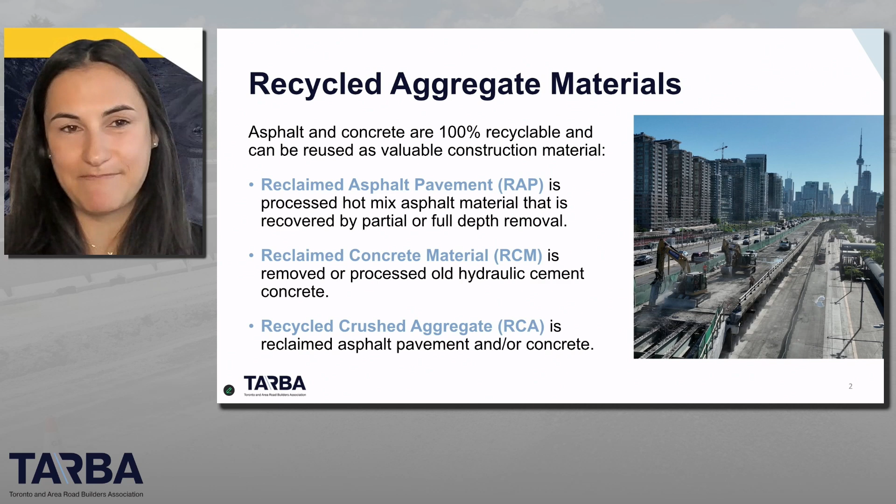RCA is a sustainable product that offers some of the greatest environmental benefits at a low cost. These materials have already met performance specifications when they were originally used, and when reclaimed, undergo an additional rigorous process of crushing, screening, testing, and quality control to be repurposed for their intended application as construction material in new projects. And Dominic, our expert speaker today, will have more on that as part of his presentation.

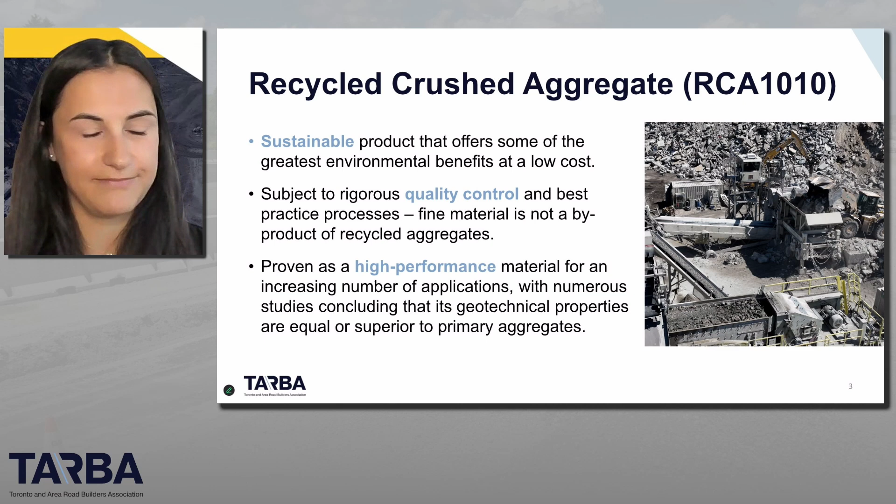Extensive testing in Ontario and internationally has shown that RCA is a high-performance material for an increasing number of applications, with numerous studies concluding that its geotechnical properties are equal and at times superior to primary aggregates. In fact, when RCA conforms to OPSS 1010, project owners can be confident that these materials will meet all performance requirements and quality expectations. The OPSS 1010 is administered jointly by the Ontario Ministry of Transportation and the Municipal Engineers Association, including representatives from the construction industry.

It allows aggregate used in road bases, shoulders, and backfill to be composed of up to 100% recycled concrete and up to 30% recycled asphalt. Hot mix asphalt can also contain up to 30% RAP. Despite these provincial standards, municipalities are setting their own local policies. As a result, practices can vary widely by municipality, really eroding some of the cost savings that we see with this product, even in economically significant regions like the Greater Toronto Area. For example, municipalities have specifications requiring primary aggregate only as part of their tenders, missing out on the benefits RCA use offers to both municipal capital budgets and their net zero targets.

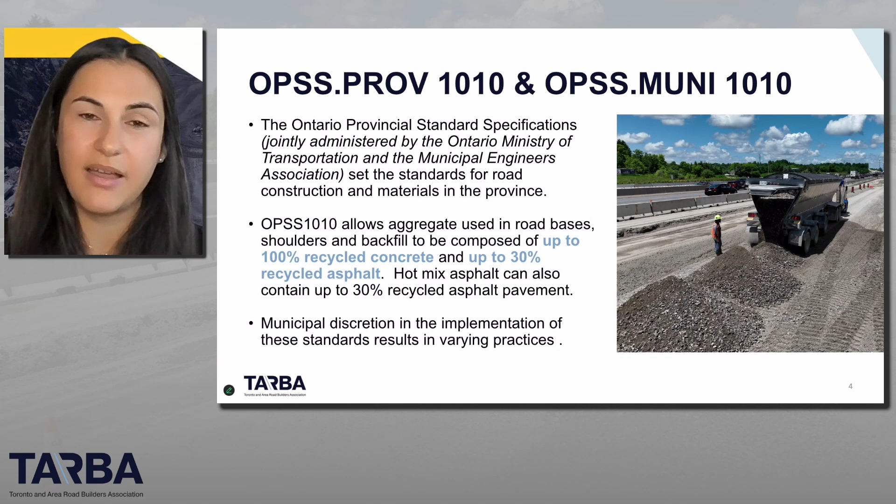The material significantly lowers carbon emissions, pollution, and project costs associated with long-haul trucking of that material, while performing equally or better than primary aggregates. The shorter distance traveled also means less traffic congestion and wear and tear on our roads. Lastly, RCA preserves non-renewable resources and extends the life of existing pits and quarries.

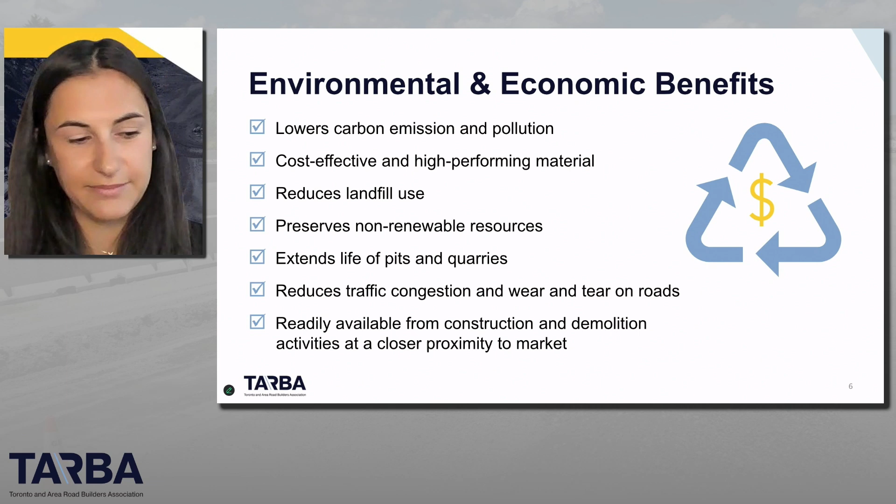The question repeated was around the cost and emission savings. So as some of you know, transportation is up to 60% of the cost of aggregates. This means that every extra kilometer aggregate has to be trucked to a job site increases the overall building costs and carbon emissions. And RCA is available at a fraction of the distance to new construction sites. The chart to the right, provided from research by EXP, estimates the fuel consumption and associated greenhouse gas emissions for the 25 million tons of aggregate that's used in the GTHA. As expected, longer distances traveled require more fuel and emit significantly more GHG emissions.

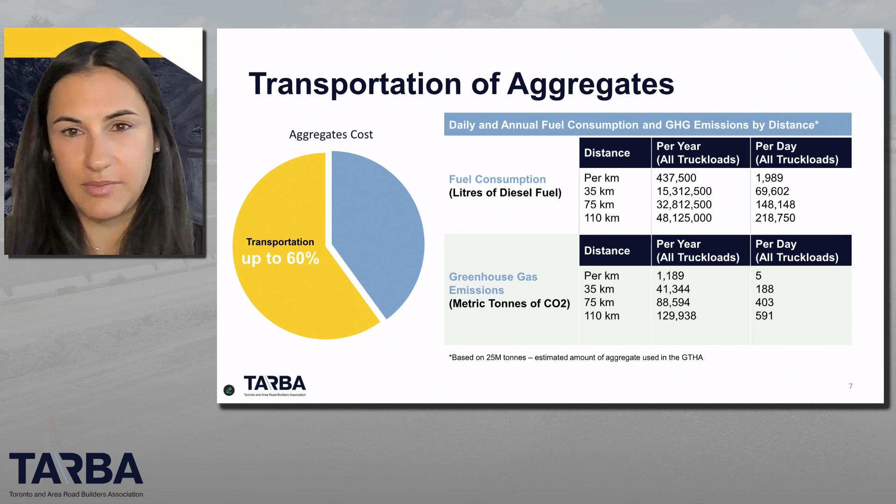As part of the EXP research, they also examined RCA use in 4 different projects, from a parking lot to a big box store distribution center in the Greater Toronto Area. The research found that the higher amount of RCA used on a project, the bigger the cost savings and carbon reductions. On average, across the 4 projects, the savings were $8 per ton, and the carbon emission reductions between the primary and recycled aggregate were predominantly derived from the shorter distance travel.

As you can see from the chart, that is 18 kilometers versus 80 for primary aggregate, 6 kilometers versus 115, 10 versus 50, and 14 versus 70. And you can see the project savings for each one on the right-hand side, along with the GHG emissions in metric tons.

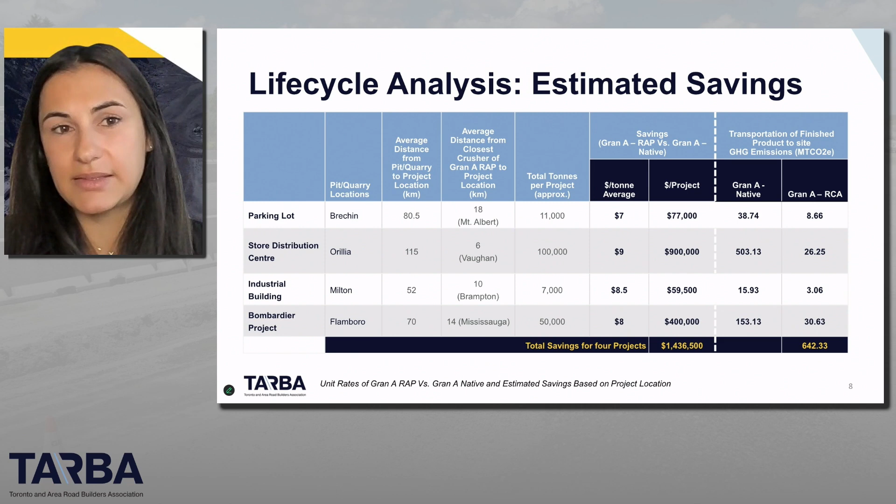The biggest impact for these economic and environmental savings can be found at the municipal level. In Ontario, just over 50% of all aggregates are used in the construction of roadways, bridges, and tunnel infrastructure. Municipalities in Ontario own and manage more roads than the provincial and federal governments combined. In fact, municipalities are the largest consumers of aggregates, using about 60 to 70 million tons per year, with 50% of their budgets allocated for construction and infrastructure.

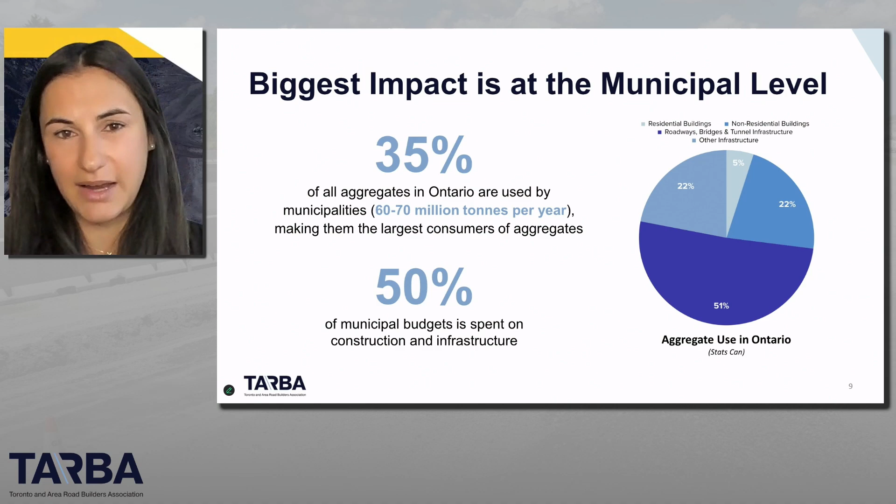Thank you, Rally. Thank you for your introduction. Glad to be here. Thank you to everybody, audience, Dominic and Jason. Pleasure to be on the panel with you, gentlemen. We did a great job together.

I just want to make a note of it, with respect to our RCA success that we had on the project. There were a lot of other key individuals from the consultants and the stakeholders that were involved to make it really happen. It goes back to the fact that the relationship matters, and creating the environment where everybody has a sustainability mindset is key. So a little bit high level what the project is about.

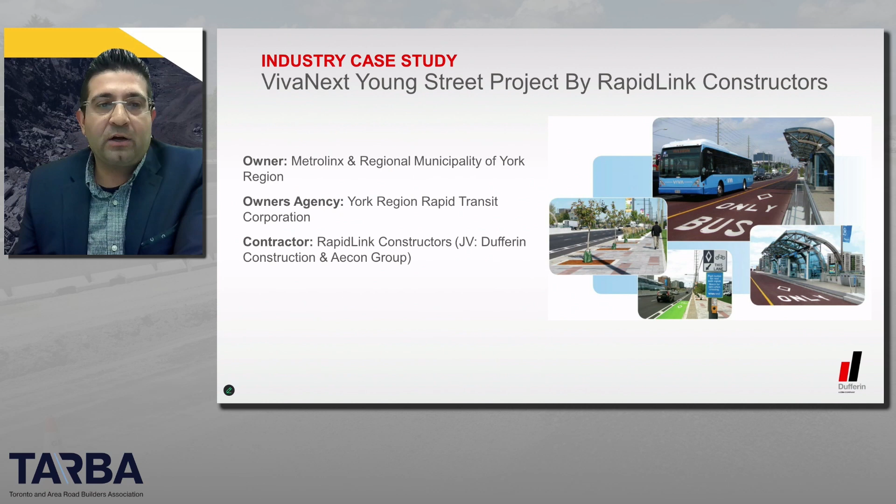So the owners, obviously Metrolinx and York Region, and the owner agency, York Region Rapid Transit Corporation, were the agency that managed the entire Viva program within York Region. Dufferin Construction was in a joint venture with Aecon for RapidLink Constructors. We were the design builder for the project. The project was about building bus rapid transit in the middle of Yonge Street. As you can appreciate, major utility relocation was required. The project was almost 10 kilometers within 3 major segments, one in the town of Newmarket, the other 2 in the city of Richmond Hill.

Building the median rapidway, full road reconstruction and widening was required, as well as the bike lane. 20 bus stations within the corridor. Beautiful landscape on either side of Yonge Street, almost 6 kilometers of landscape on that project, and also within the median. Part of the program required underground work in the wet utilities, in terms of the storms, the sanitary and the water main, and also rehabilitation of the existing. Retaining walls were required along the corridor because of the grade differences, and also culvert improvements and headwalls. So you can imagine how much granular was required on the job.

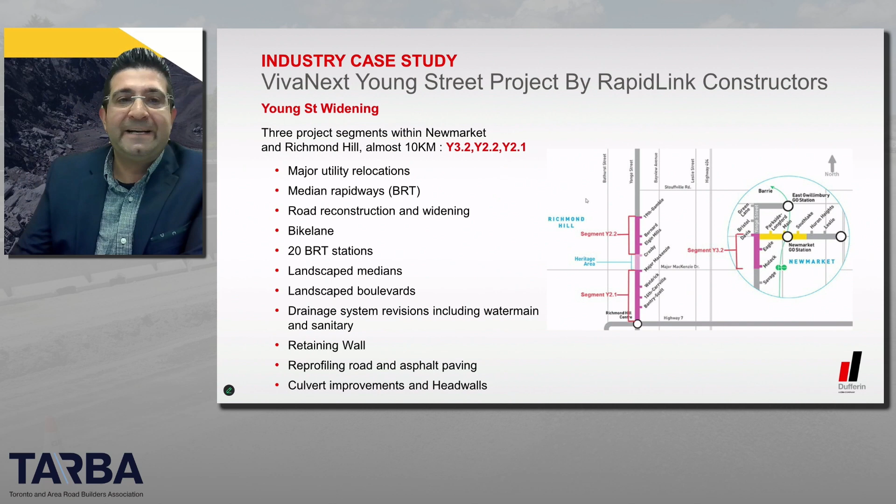Before we dive in a little bit on the case study, I think it's an opportunity to share with you what we see as sustainability within the projects, and what is really common in our industry, and particularly in our Dufferin operation, is really understanding the network of the sources to the projects. As Raleigh mentioned, the carbon footprint is really important to consider, and the recycling of material in terms of the concrete and asphalt, and the efficiency.

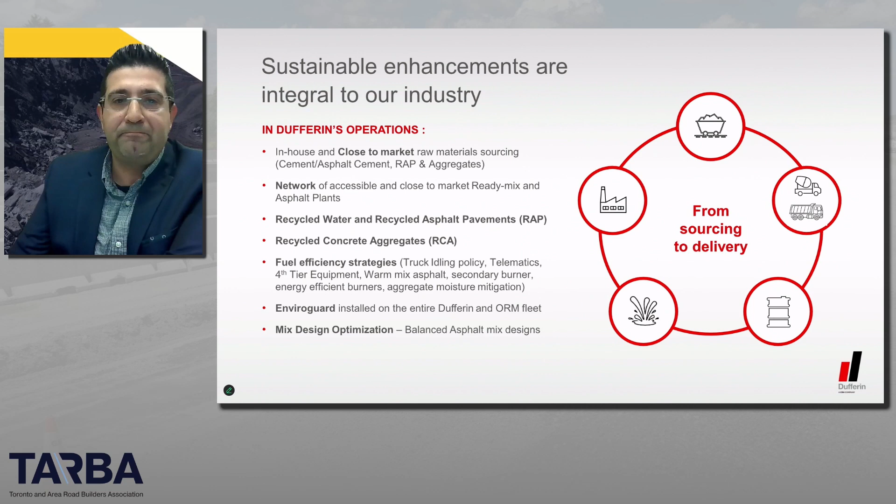One thing is that there are other products from Dufferin Concrete. We're really proud of the EnviroGuard that they used on Viva Yonge Street to have that sustainability enhancement, to recycle aggregate and also recycle water. And mix optimization is top of my mind when it comes to RAP, recycled asphalt, in the mix optimization.

So what was our project team approach? Really, when it comes to sustainability, we got to understand what really moved the needle on this job, where around 200,000 tons of aggregate were required for the road base, sub base, and trench backfill. So it was an opportunity to really move the needle.

So everybody understands why we're considering recycled aggregate, particularly the RCA, recycled concrete. And in order to get it to the finish line, we really need to understand the owner's concerns, the constraints they have, the requirement guidelines, and work toward the solution. Everybody was part of the solution.

Working collaboratively, we developed the controls and measures in place. Obviously OPSS 1010 is a great guideline, but there were other concerns that came up through the development of the procedure in terms of permeability, and Jason is going to talk about that.

We had guidelines to monitor every 10,000 tons. We did that sampling to understand where the permeability is. And also the lead designer's involvement and the engineering review throughout the entire process helped us get over some of the roadblocks.

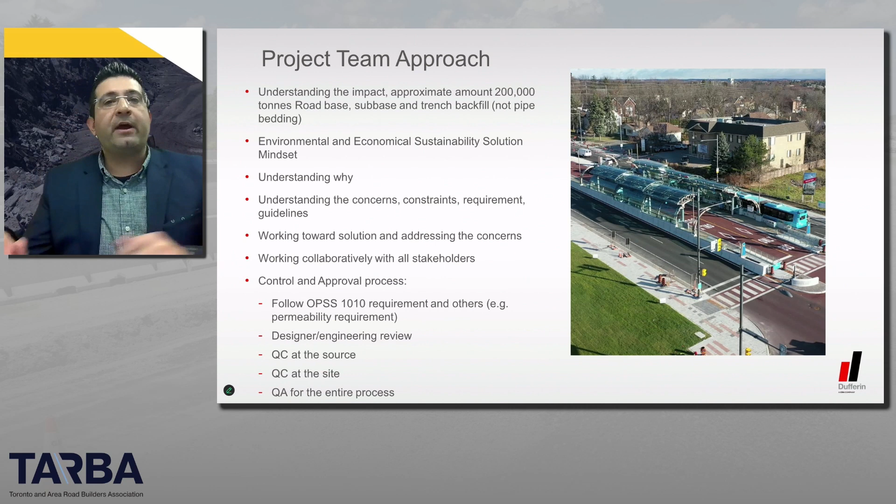When it comes to quality control, it's got to be at all levels. At the source, obviously, that Dominic is going to talk about, but at the job site we had to make sure the physical properties, gradation, and permeability were met, and QA was established throughout the entire process.

One thing I want to point out, you can clearly see the carbon footprint consideration here. You see the red dot on the right-hand side that shows the Crupi that helped us recycle, and the left-hand side at the bottom was the original quarry. You can see the project in the blue line, so you can see how much saving could have been done on the hauling and also the emissions in terms of the carbon footprint. It was a great initiative.

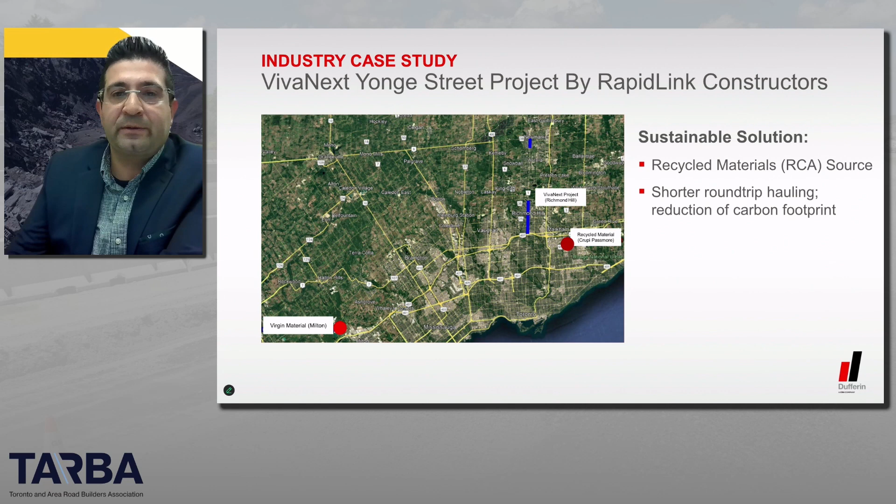And also, you can imagine how much concrete we removed on the job. Over 500 loads, just from the sidewalk, went back to be recycled and came back to the job. So it was a great opportunity for sustainability there.

So to wrap up my presentation, I think really understand what your project requirements are. There are great guidelines you can use to develop that sustainability solution. And you need our TARBA members, we have great contractors that have done quite a bit of work in terms of recycling material, and tell us what your needs are. Let us know what your requirements are and what your benchmark is, and have the flexibility and mindset to give it a try even if you haven't done it before, and develop that quality control and quality assurance process that gives you the confidence it's going to work.

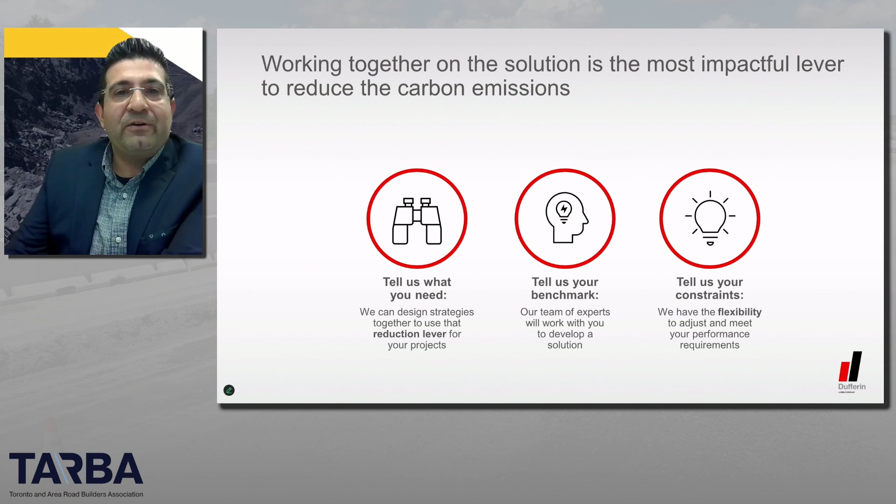So Raleigh, this is the end of my presentation. Pass it on to you.

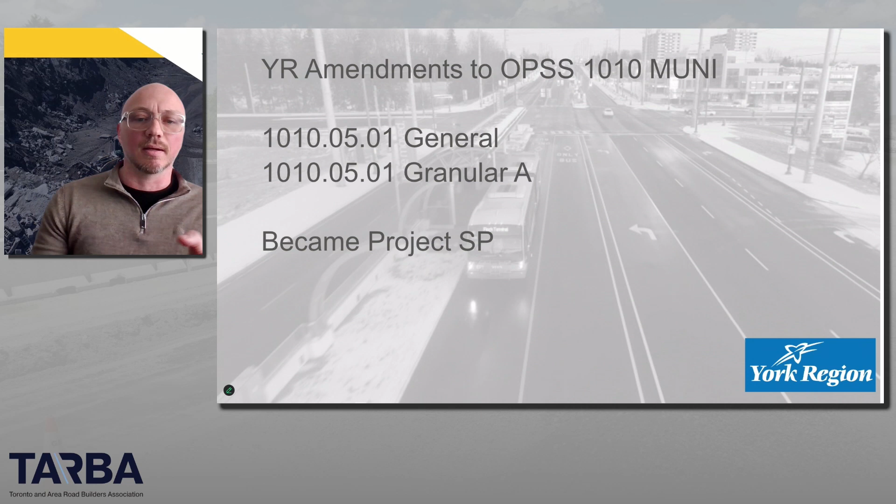Knowing that we were going to use this product, York Region also prioritized our permeability in our drainage base, so our roadway longevity prevents going back and reworking in an early life, which would discredit all the savings you see in both economic and emissions terms. Making sure that this roadway lasts what the design criteria was is critical.

So part of that is the QC process, which Dominic will speak to, starting at Crupi's. Then the designer and builder get together and do their QC and quality assurance, plus our oversight as well. York Region Rapid Transit Corporation administered the project on behalf of York Region, and they had a third party, what we called the Technical Advisory Construction Oversight Team. They also had quality assurance as well, so quality control and quality assurance was a priority and was obviously accomplished through this process.

To help this, we also spec rigid subdrains. Another great conversation me and Asan had over the life of the project was, why do you guys use rigid over flexible? The reason is basically experience - we've seen better performance and longevity out of rigid subdrain over flexible. We still use flexible in the radiuses, of course, but in the straight line tangents we use rigid, and that has obviously paid dividends over the life in terms of performance.

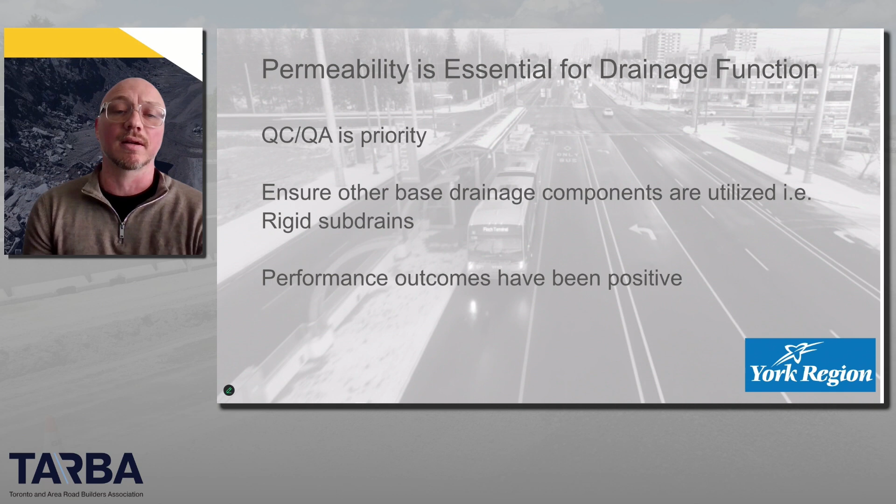We're just coming now out of the 5th winter, 6th really, because the base had base course asphalt on it for one winter. So the recycled aggregate has actually gone through 6 winters, coming out of the 5th now - this was as of yesterday. The performance of the roadway as far as bottom-up issues - none. We have no potholes, not a single pothole along the segments, and no heaving.

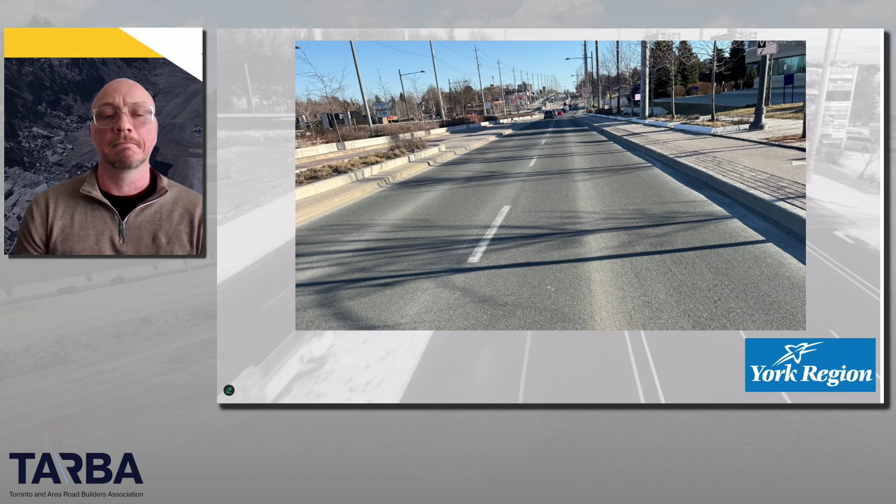You have your performance issues around your nodes - you can't get away from structures, specifically the ones in the wheel path. This wasn't a total reconstruction, obviously, because we wanted to reuse some of the infrastructure to lower our impact. So some of the old catch basins are now maintenance hole structures in the wheel path, and those do take a beating - we've seen that. But as far as the actual roadway supported by the RCA, we've seen no issues.

So York Region in general encourages and supports, and even specifies, many ways to use both RCM and RAP.

In our roadway design guidelines for pavement design, we obviously spec OPS 1010 and 1151 and certain criteria that it meets, but we also want to see from the geotech engineer a design to reuse, recycle, and the least option is remove. So just like reduce, reuse, recycle, it goes in that priority, right? We want to reduce first, reuse second, recycle last. The same thing goes for our design criteria.

So can we reuse it? Can we recycle it? Or do we have to remove it? And even if we do remove it, can we bring it back like we did with the RCM? Something like a CIREAM project, which is in-place recycling, so we don't even remove it from site—we're recycling it right in place. That's something another VivaNext project used. I don't want to discredit what we did here, but just showing how much we encourage this sort of product—we used it on another VivaNext project.

We also utilize RAP in our base course Superpave, and of course we use RCM in our granular base.

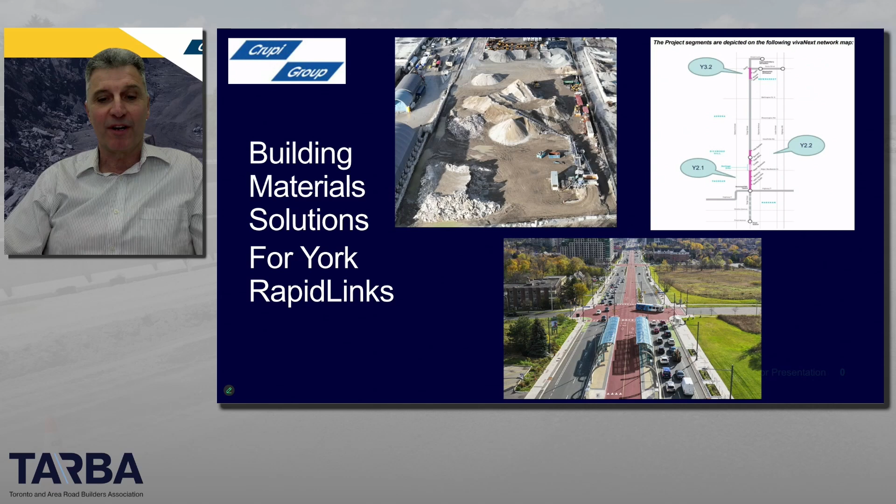Crupi was chosen for the services provided: asphalt mix, accepting the concrete rubble from the site, and producing recycled crushed aggregates. We had to show that we had confidence to transform the concrete rubble into a recycled crushed aggregate. Crupi had to propose that we were strategic to the job because we had a location geographically well positioned for the project, and Crupi had to show RapidLink that we had a strong track record for quality, which Jason alluded to earlier, and show what to expect from Crupi—safety being a huge priority, quality and service.

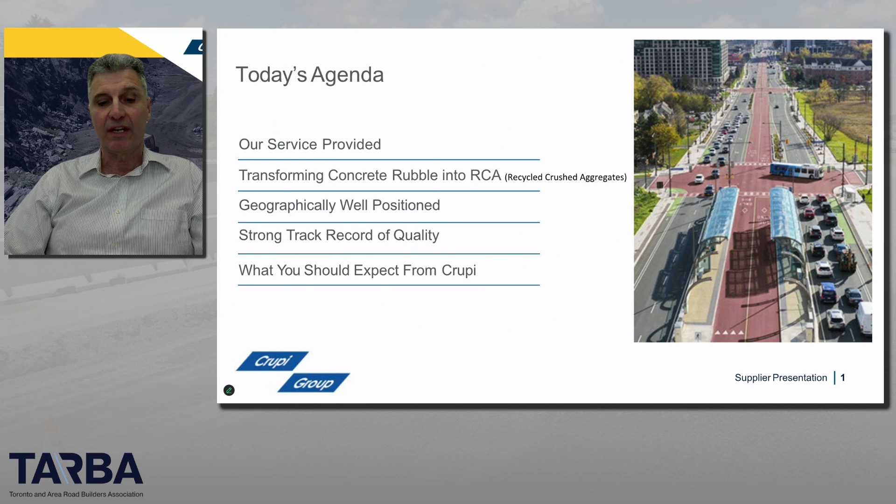Now you've seen this slide before, I'll just briefly tie in. So Y3.2 was the northern end in Newmarket, Y2.2 and Y2.1 were the southern end in Richmond Hill. Our main focus was to supply and place the asphalt, but the main point is the three-quarter recycled crushed aggregates for construction of the dedicated median rapidway, the boulevards, and the new bicycle lanes.

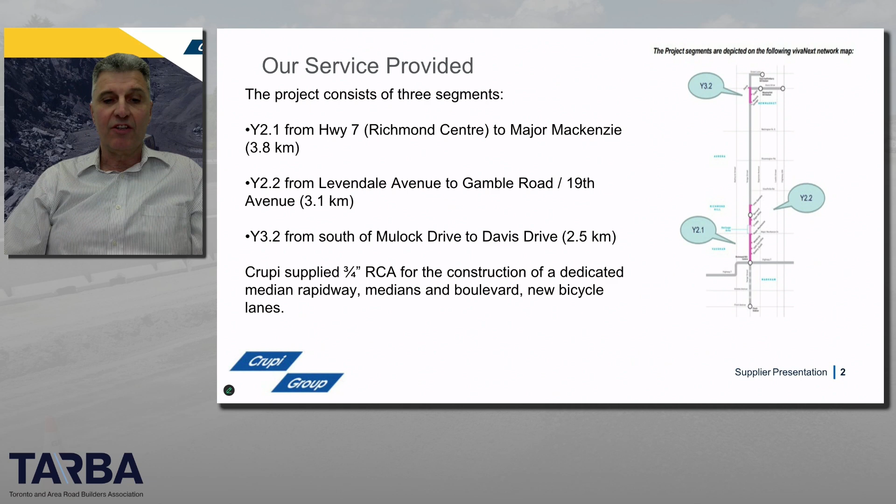Now this is a very interesting slide. York Rapid Link's contractors removed the concrete curbs, sidewalks, pads, etc., and delivered the material to the Crupi site. Crupi processed the material and produced recycled crushed aggregates. Crupi was responsible for the quality control of the recycled crushed aggregates, and Crupi loaded the material onto the York Rapid Link contractors' trucks.

One thing I want to point out here is the first image on the top right, July 2015—that's Yonge Street and Major Mackenzie facing southbound. You can see two lanes facing northbound, a left turn lane, a center island, then two southbound lanes and a merge lane on the right. As you go to July 2019, you can see construction starting to happen—they got rid of the center median. You can see the two lanes coming northbound, the left turn lane, two southbound lanes, and work happening on the far right.

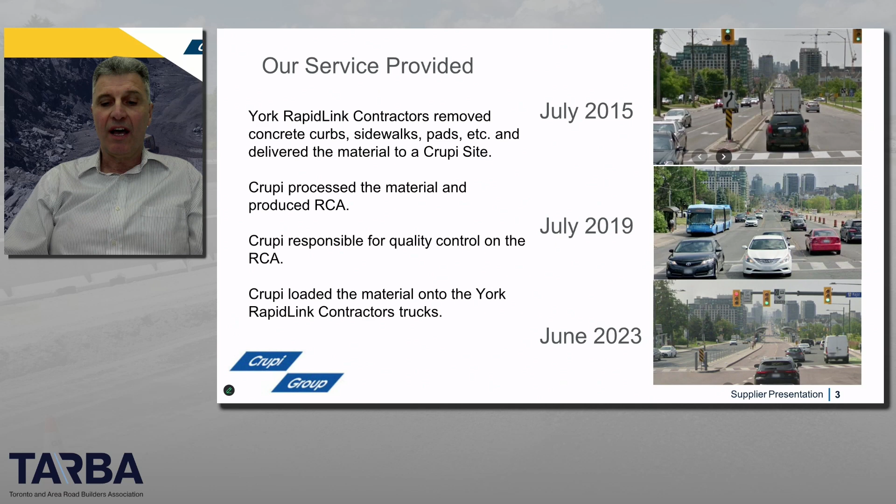What I'm getting at here is, then you see June 2023, you can see the expansion of the roadway is visible, and as Jason talked about earlier, there's no signs of differential settlement at this location and throughout the whole project. This shows how well recycled crushed aggregates held up.

Now, the customer first approach that Hassan also alluded to: we think Rapid Link chose Crupi for the asphalt on the project and integrated acceptance of all the concrete rubble and to provide recycled crushed aggregates in return. Now, Crupi had to ensure that we can accept all the concrete rubble from the site, which we did, and that's why we selected that site there, which is closer to the job site. And we had to also show confidence that we would supply a quality product and ensure that we did not cause any delays to the job.

So we had to make sure that the product that we sent out there, we couldn't afford to send out a product that would have to be ripped out and put down again. That would cause delays to the job. So we did go through rigorous QC testing, which we'll talk about. Crupi also had to guarantee that we would be able to accept the rubble from the site and load up the trucks to gain efficiency by utilizing backhauls. So some of the trucks that came down, after we had the stockpiles in place, we would actually load up the material and send it right back to the site.

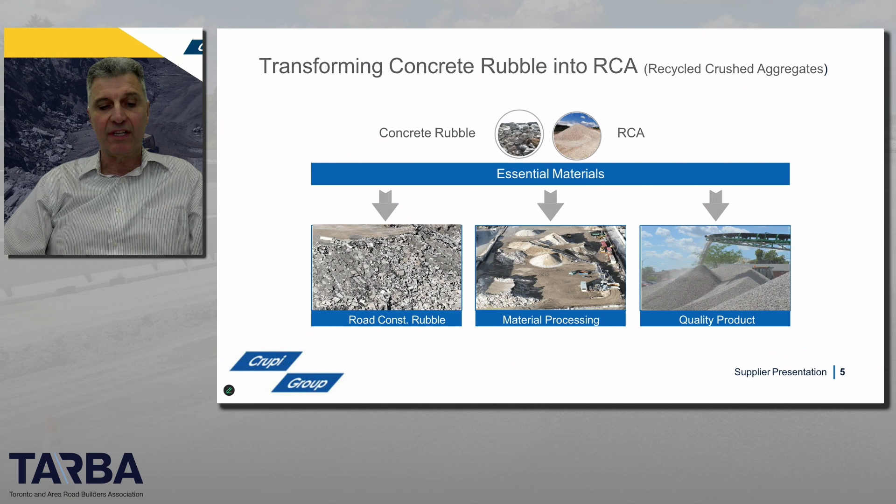Now, transforming concrete rubble into recycled crushed aggregates. That is one of our specialties at Crupi's, and we selected a site that could accept the material. You can see the site in the image in the middle there, and we have a crusher on site, and to produce a quality recycled crushed aggregate, we had to do a lot of QA and QC testing. So what does this entail?

So the first thing that we had to do is inform RapidLink of our safety protocols, so then when a truck shows up to our site, there would be no delays. One thing to add is that we always followed the safety protocols that were in line with RapidLink safety protocols. So if anything happened on a RapidLink site, we would actually immediately do something with a Crupi site to make sure that we're always in line.

Now, we have to inform RapidLink of our QC protocols, in particular, inspecting the incoming material and providing documentation. We would print a ticket for every load that came to our site. After the truck entered our site, we would take another look at the material as the material was dumped in the yard and separate the material based on specific criteria, whether it's concrete and asphalt, etc.

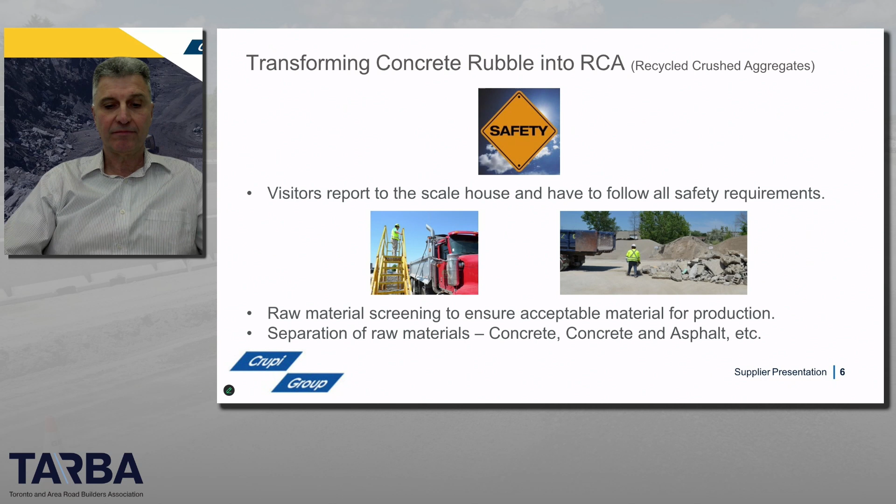Now, we started crushing the material, and now we had a stockpile. And we would start crushing material into 3/4 crushed aggregates. We chose to do a gradation every 1,000 tons. We did physical properties every 5,000 tons, and we also did proctors every 3 months. We felt that this protocol would guarantee RapidLink the best quality product.

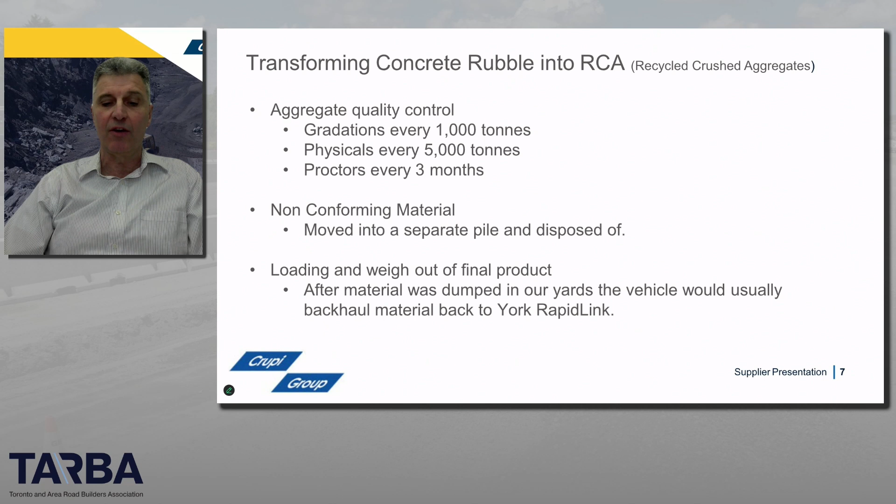Also, if we had any non-conforming material, we would move it to a separate pile and then reblend it in to make sure that it became a conforming material. And if there's any non-conforming materials that cannot be produced into aggregates, such as plastic, wood, rebar, etc., it was disposed of immediately. Once the final product passed specification, then and only then would it be loaded out onto RapidLink trucks.

Now, we talk about sustainability, like what actually happened. Just to give you some information here, an estimated 5,500 loads of concrete rubble were dumped in the Crupi yard. This all happened on a 4-acre dedicated area. Now, the concrete that got dumped in the yard, that's not enough to produce all the material that was shipped back to RapidLink, because there was over 250,000 tons of 3/4 recycled crushed aggregates. The first load was shipped in April 2017, and the last load was shipped in June 2021.

Over 2,000 tons of 3/4 select crush was shipped out. The quantity of recycled aggregates shipped out ranged from 20 tons to 2,500 tons in a day. This equates to 1 truckload up to 125 truckloads shipped out daily of recycled crushed aggregates for RapidLink. We did this on top of all the regular business that was happening out of that site. Loading and weigh out of the final product was also important. After material was dumped in our yards, the vehicle would usually backhaul material back to RapidLink. This was an efficiency thing that helped out RapidLink and the project.

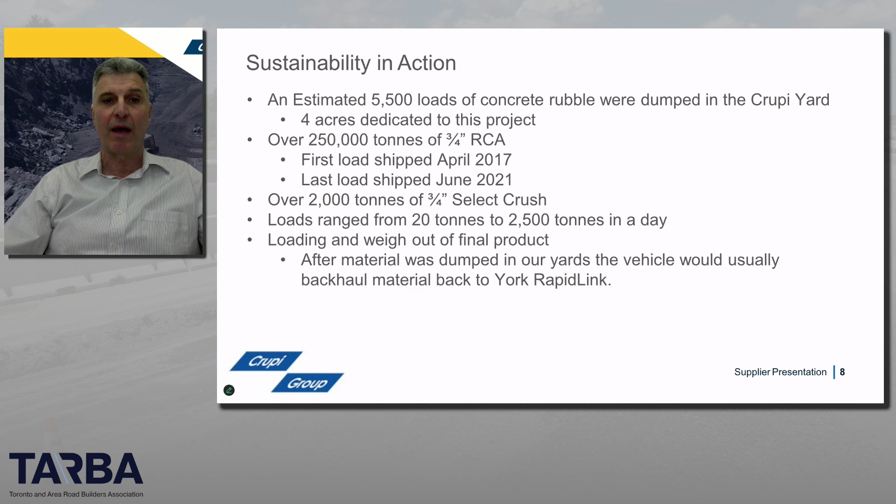This reduces the demand for virgin materials by offering a cost-effective alternative to quarrying new resources. And the challenges that people usually talk about with recycling concrete, because of quality, consistency, and performance issues, were eliminated because of the QC plan and the frequency of testing. One thing everybody should think about is, if you're doing this, you have to make sure you dedicate a good QC plan to make sure you have quality going back out to the field.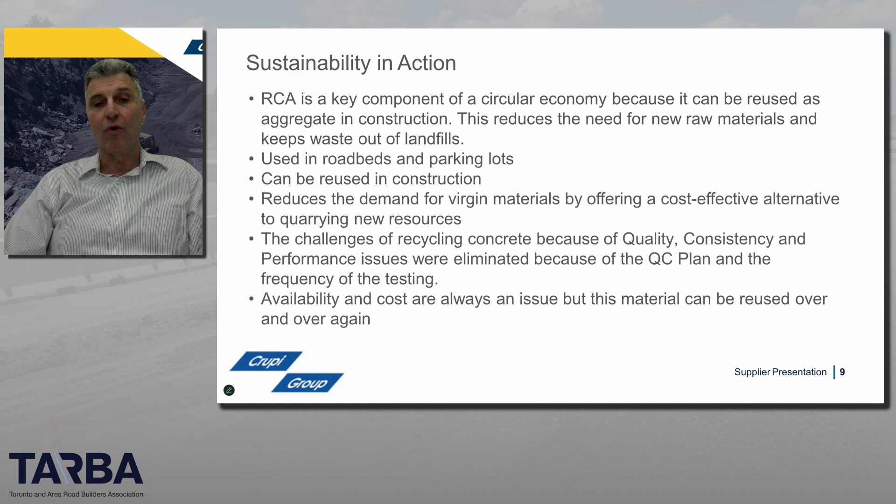And availability and costs are always an issue, but this material, recycled crushed aggregate, can be reused over and over again. So that savings will always be there. And thank you. And that's back to you, Riley.

Thanks. Thank you so much, Dominic, for that detailed look at both the material production and the quality control management. Those are the questions that have come up the most, so I think that was really well detailed, and we'll get into some of those further questions as well. Thank you all for keeping your presentations so timely. It means we have lots of time to address the number of questions that have come through. And a lot of them, as expected, are about cost savings.

Yeah, absolutely. As I mentioned, when it comes to sustainability and recycling, the needle mover really matters. We see the savings. Obviously, the source really matters, where it is located with respect to the projects. But on this specific project, yes, it was a saving that blended in through the whole design build program that we had.

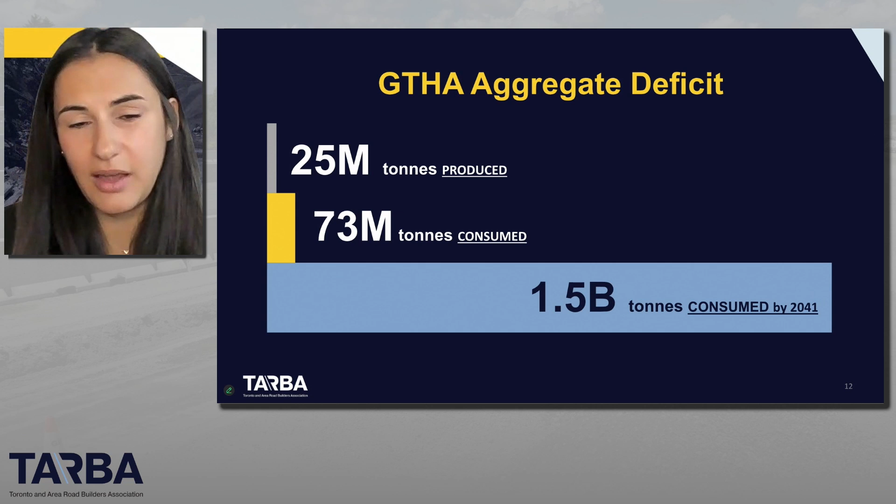And that number is projected to increase to more than 1.5 billion tons by 2041, all while we're exhausting close-to-market sources. And as I hope we made very clear, the further we need to travel for those aggregates, the higher the cost of construction and our impact on the environment. So I know municipalities are already struggling with the capital projects that they need to put in place. So this would really reduce their capacity to build even more with the cost increasing.

So what you saw from the video, and these are sort of the big line numbers, is that if municipalities adopt just a 20% recycling rate, that would avoid extracting up to 33 million tons of new aggregates per year. It would result in cost savings of more than 264 million, and that's not accounting for some of the indirect costs like the wear and tear on existing roads from the long haul trucking.

And GHG emissions, and this is pretty powerful, that would be equivalent to taking 15 million gas cars off the road for a year. And just in case you're wondering, that's way more than all the cars in Ontario that we have right now.

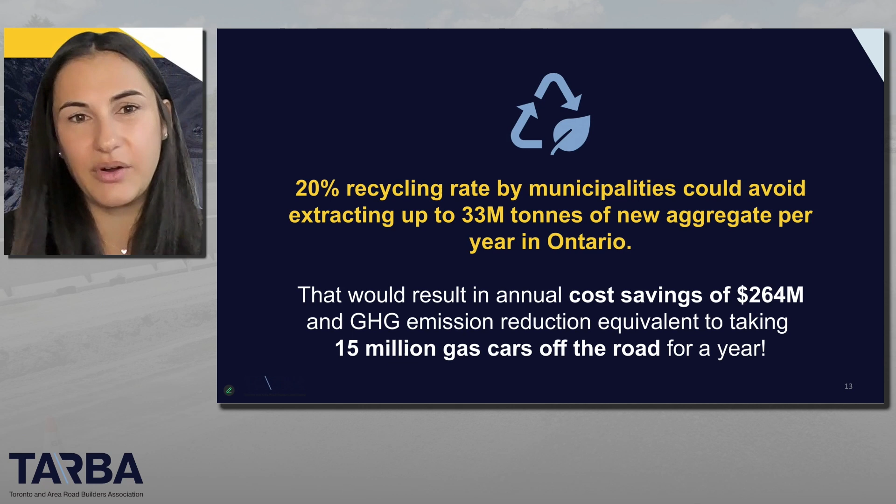And I will say the 20% recycling rate was selected because the Ministry of Transportation, which I think EXP mentioned, has used RCA in the maintenance and expansion of our 400 series highways since the 1970s. So that's the rate that they're on, and I think it's actually just a little bit higher than that. So we do feel that 20% is a very achievable target for municipalities that would deliver on those significant costs and environmental benefits.

And as you heard from all the speakers, quality control is what's paramount, just as with any other material use, not exclusion. As mentioned at the beginning and throughout our presentation, there's lots of research and lots of case studies that have shown that when RCA conforms to OPSS 1010, municipalities and really any project owner can be confident that these materials will meet all performance requirements and the quality expectations.

So this is why we would urge you, when you're considering the use of this product, effort should be directed to enforcing quality rather than restricting its use. And really, collaboration with industry is the most successful path forward that we've seen.

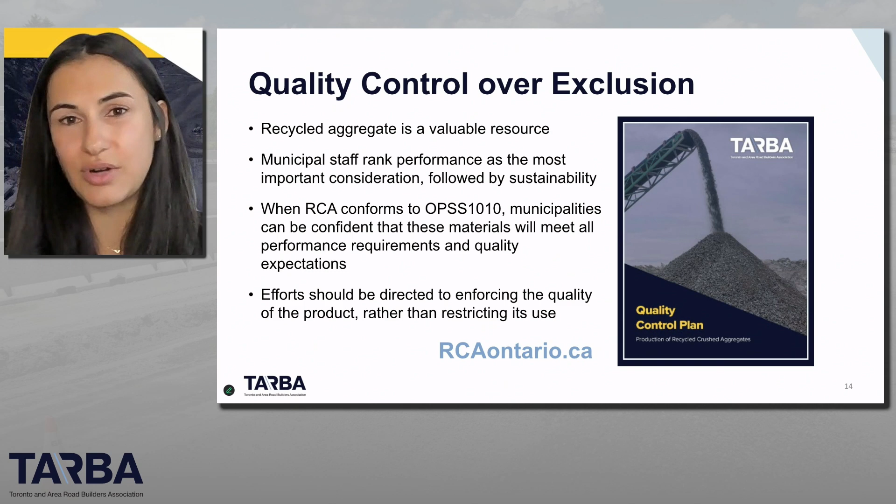So at the website down there, rcaontario.ca, you'll find TARBA's quality control plan that reflected a lot of the measures that Dominic included in his presentation. And it really provides a technically sound manual for producing, utilizing, and ensuring the quality of recycled crushed aggregates. And this can be used as a resource for producers, contractors, and project owners.

And lastly, to leave you with what municipalities can do to capitalize on this: first and foremost is really to include sustainability as part of the initial project design. Make sure that RCA is included as part of the tenders for roads, bridges, sewer and water mains, subdivisions, transit projects, and it's not restricted to just primary aggregates. Aligning with OPSS 1010 would reduce administrative burden, ensure quality and compliance, and encourage wider adoption, and really collaborating with industry.

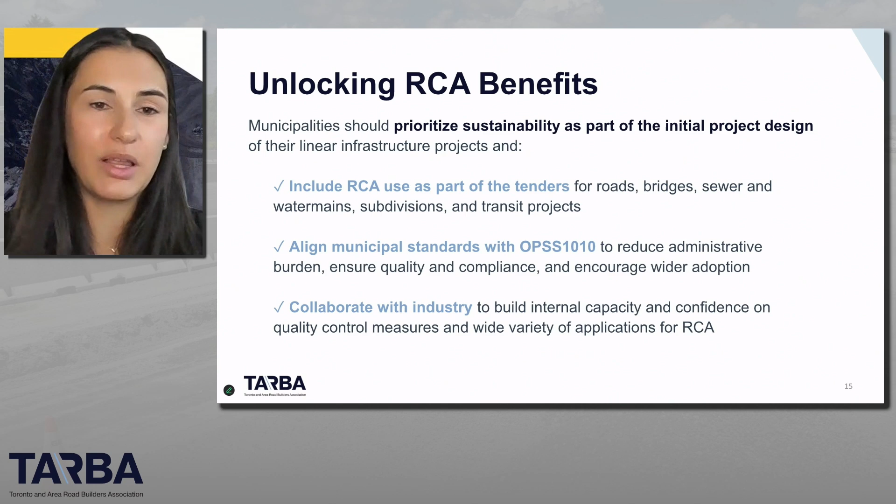On that same website, rcaontario.ca, you'll find some additional resources, including the EXP research that I mentioned, along with an additional document from EngTech on gradation equivalency, and recorded presentations from last year's seminar by EXP, MTO, and Dominic, who's a great repeat guest here.

So this concludes our seminar. Thank you to our speakers for sharing their experience and expertise, and to everyone watching for taking time out of your busy schedules to learn more about the use of this sustainable material. We really hope that you would consider the information provided today and become champions within your own organizations for the increased use of RCA in linear infrastructure projects.